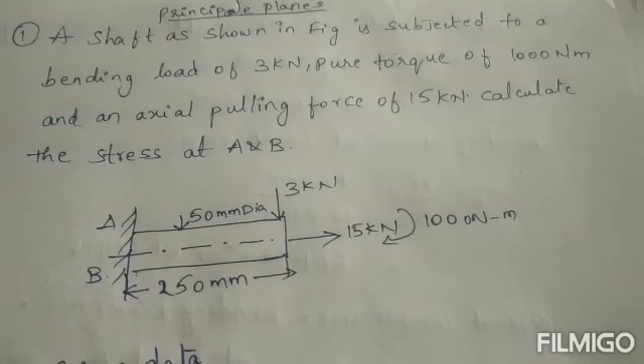స్ట్రెస్. నేను 3 ఫార్ములాస్ చెప్పాను, ఒకసారి ఆ నోట్స్ చూడండి అర్థమవుతుంది. In the last classes also we had discussed one problem on the principal stresses problem, అది మనం లాస్ట్ క్లాస్ ఆల్రెడీ చేసాము. ఒకసారి నోట్స్లో రివైజ్ చేస్తే అర్థమవుతుంది.

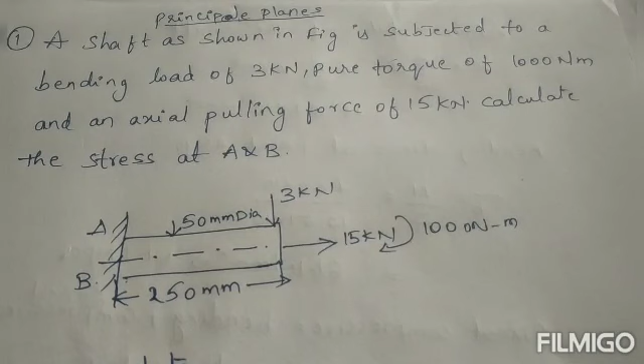నెక్స్ట్ ప్రాబ్లం ఇంకోటి డిస్కస్ చేద్దాము. A shaft as shown in the figure is subjected to a bending load of 3 kN, pure torque of 1000 Nm and an axial pulling force of 15 kN. Calculate the stresses at A and B. పాయింట్ A అండ్ B దగ్గర స్ట్రెస్సెస్ అనేవి కనుక్కోమన్నారు.

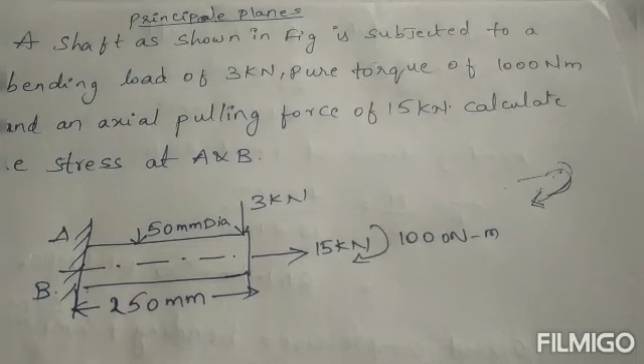క్వశ్చన్లో బెండింగ్ లోడ్ యాక్ట్ అయింది. బెండింగ్ అప్పుడు మెషిన్ మెంబర్ ఒక పాయింట్ నుంచి అనదర్ పాయింట్కి బెండ్ అవుతుంది. బెండ్ చేస్తున్నప్పుడు ఇక్కడ ట్విస్టింగ్ మూమెంట్ అంటే టార్క్ కూడా యాక్ట్ అవుతుంది. అంటే వీ షుడ్ ఫైండ్ అవుట్ బోత్ ద బెండింగ్ అండ్ ఆల్సో ది ట్విస్టింగ్ మూమెంట్ యాక్టింగ్ ఇన్ ది షాఫ్ట్.

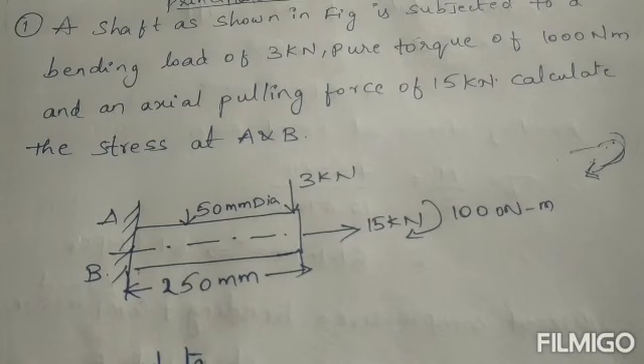In this question they had given pure torque of 1000 Nm and an axial pulling force of 15 kN. Calculate the stresses at points A and B. డయాగ్రామ్ చూస్తే మనకి ఒక మెషిన్ మెంబర్ ఇచ్చారు పాయింట్ A అండ్ B దగ్గర. ఆ మెంబర్లో 2 లోడ్స్ యాక్ట్ అవుతున్నాయి, వన్ ఇస్ 3 kN, అనదర్ వన్ ఇస్ 15 kN. 3 kN కంప్రెసివ్ ఫోర్స్ లో యాడ్ అవుతుంది, అంటే అది డౌన్వర్డ్ పొజిషన్.

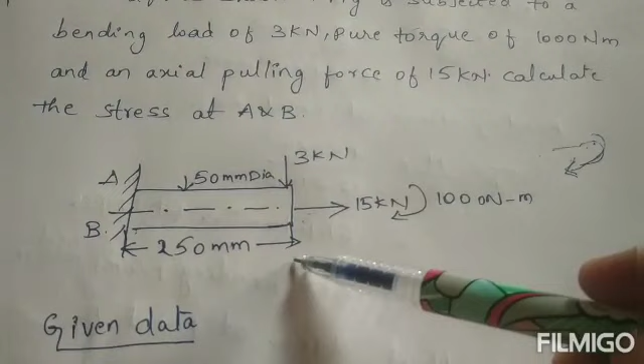15 kN విత్ ద లోడ్ ఈస్ యాక్టింగ్ ఎట్ ది యాక్సిస్, అంటే యాక్సియల్ పుల్లింగ్ ఫోర్స్ అనేది జరుగుతుంది, అంటే టెన్సైల్ లోడ్ యాక్ట్ అవుతుంది. ఇక్కడ టార్క్ ఇచ్చారు 1000 Nm అండ్ ఆల్సో లెంత్ ఆఫ్ ది షాఫ్ట్ ఇచ్చారు. ఇప్పుడు స్ట్రెస్సెస్ అట్ పాయింట్ A అండ్ B దగ్గర ఫైండ్ అవుట్ చేయడం జరుగుతుంది.

గివెన్ డేటా: W 3 kN ఇచ్చారు, కన్వర్ట్ చేస్తే 3 × 10³ అవుతుంది. టార్క్ T ఇచ్చారు 1000 Nm, దాన్ని న్యూటన్ mm లో కన్వర్ట్ చేస్తే 1 × 10⁶ Nmm అవుతుంది. నెక్స్ట్ లోడ్ P = 15 kN ఇచ్చారు, అంటే 15 × 10³ N అవుతుంది. D డయామీటర్ 50 mm, L is equal to 250 mm.

ఫస్ట్ వీ షుడ్ ఫైండ్ అవుట్ ది క్రాస్ సెక్షనల్ ఏరియా ఆఫ్ ది షాఫ్ట్. ఏరియా ఫార్ములా తెలుసు, A is equal to π/4 d². D సబ్స్టిట్యూట్ చేయండి, A వాల్యూ వచ్చేస్తుంది.

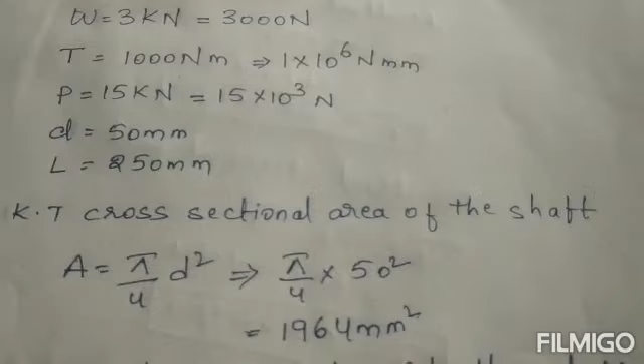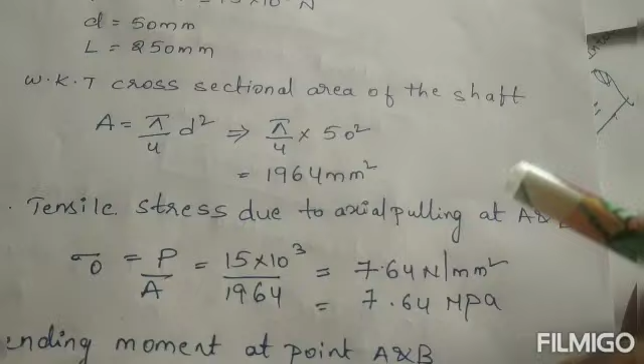నెక్స్ట్ టెన్సైల్ స్ట్రెస్సెస్ డ్యూ టు యాక్సియల్ పుల్లింగ్ ఎట్ A and B: సిగ్మా O is equal to P/A. కంప్రెసివ్ ఫోర్స్ తీసుకుంటున్నప్పుడు రెండు ఫోర్సెస్ యాక్ట్ అవుతాయి, వన్ ఇస్ బెండింగ్ అండ్ ఆల్సో ది డైరెక్ట్ కంప్రెసివ్ ఫోర్స్. సిగ్మా O is equal to P/A, వాల్యూ సబ్స్టిట్యూట్ చేస్తే సిగ్మా O 7.64 MPa వస్తుంది.

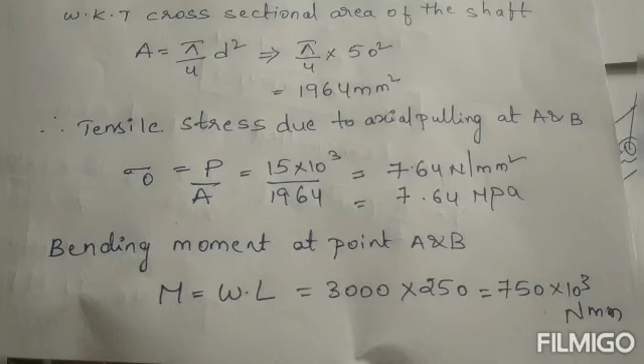యాక్సియల్ పుల్లింగ్ దగ్గర ఫోర్స్ యాక్ట్ అవుతుంది కాబట్టి బెండింగ్ మూమెంట్ అండ్ ట్విస్టింగ్ మూమెంట్ రెండు యాక్ట్ అవుతుంది. ఇప్పుడు బెండింగ్ మూమెంట్ అట్ పాయింట్ A అండ్ B ఫైండ్ అవుట్ చేయడం జరుగుతుంది. M is equal to W into L, దాని యొక్క లోడ్ అండ్ లెంత్ క్యాలిక్యులేట్ చేస్తాము. W అంటే 3000 తీసుకుంటాం, L అంటే 250 క్వశ్చన్లోనే ఇచ్చారు.

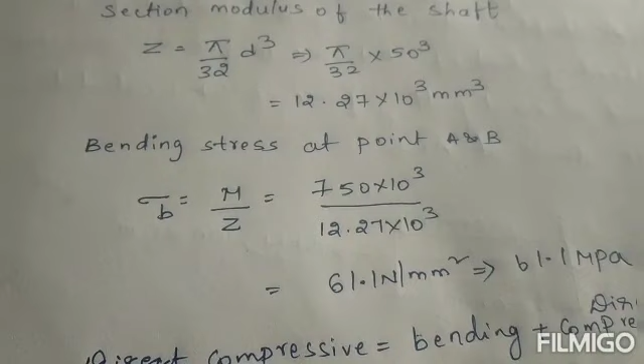నెక్స్ట్ సెక్షన్ మాడ్యులస్ ఆఫ్ ది షాఫ్ట్ తీసుకుంటాం. షాఫ్ట్కి సెక్షన్ మాడ్యులస్ Z తో టర్మ్ చేస్తాం. Z is equal to π/32 × d³ తీసుకుంటాం. సబ్స్టిట్యూట్ చేస్తే 12.27 × 10³ అవుతుంది.

బెండింగ్ స్ట్రెస్సెస్ అట్ పాయింట్ A అండ్ B, అంటే సిగ్మా B. స్ట్రెస్ బెండింగ్ స్ట్రెస్ ఇస్ ఈక్వల్ టు M/Z, బెండింగ్ మూమెంట్ బై సెక్షన్ మాడ్యులస్. సబ్స్టిట్యూట్ చేస్తే వాల్యూ 61.1 MPa వస్తుంది, అంటే N/mm². 1 N/mm² ఇస్ ఈక్వల్ టు 1 MPa, అందుకని మెగాపాస్కల్ కూడా రాసుకోవచ్చు.

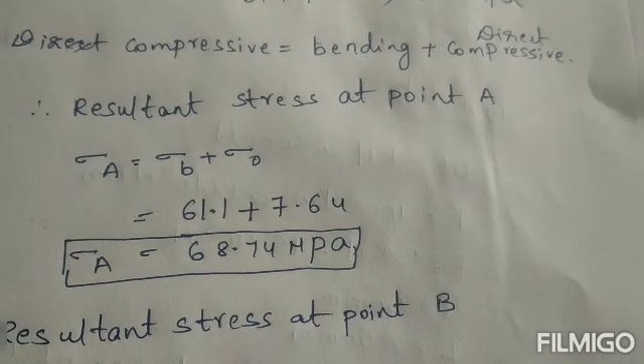ఇందాక చెప్పాను కంప్రెసివ్ స్ట్రెస్ అంటే బెండింగ్ ప్లస్ డైరెక్ట్ కంప్రెసివ్ స్ట్రెస్ తీసుకోవచ్చు. ఇప్పుడు రిజల్టెంట్ స్ట్రెసెస్ అట్ పాయింట్ A తీసుకోవాలి, అంటే సిగ్మా A ఈస్ ఈక్వల్ టు సిగ్మా B ప్లస్ సిగ్మా O గా తీసుకుంటాం. బెండింగ్ స్ట్రెస్ అండ్ ఆల్సో డైరెక్ట్ కంప్రెసివ్ స్ట్రెస్ వాల్యూ సబ్స్టిట్యూట్ చేస్తే సిగ్మా A వస్తుంది. అలాగే రిజల్టెంట్ స్ట్రెసెస్ B అనేది తీసుకుంటాం.

If you see in this paper, the concept of direct and bending stresses which is acting in the equations.

Okay, first I am taking, there are two types of loads: one is axial load and also the eccentric load. Let me take this diagram.

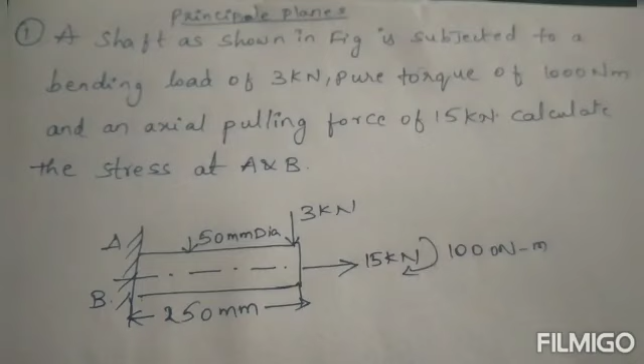In the last class we have discussed about the different types of stresses acting in the machine members, and also the introduction of the design of machine members, and we have discussed the principal stresses and the principal strains acting in the different types of machine members.

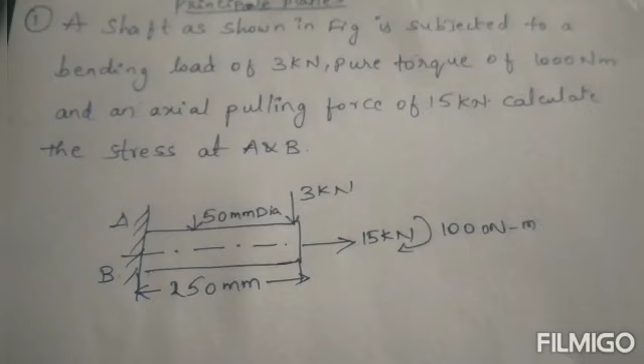In this class we will discuss one of the problems on principal planes. Principal planes is nothing but it is acting both in the principal stresses and also principal planes. Okay, let's see the problem.

First study the problem. A shaft as shown in the figure is subjected to a bending load of 3 kN, pure torque of 1000 Nm, and an axial pulling force of 15 kN. Calculate the stresses at A and B.

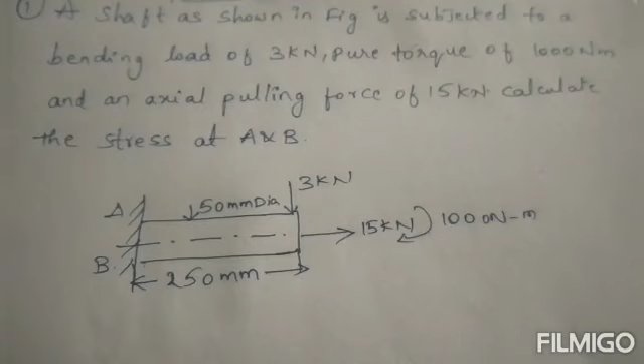What they had given in the problem: they had given the bending load, torque, and axial pulling force. Axial pulling force means, as I have already discussed in the last class, axial is nothing but the load acting at the center of the axis. Axial pulling force of 15 kN.

Calculate the stress at A and B. If you see in this diagram, this is one type of machine member. In this machine member there are two stress points, namely A and B, and also two loads are there acting at A and also the axial pulling force. It is nothing but 3 kilonewton and also 15 kilonewton.

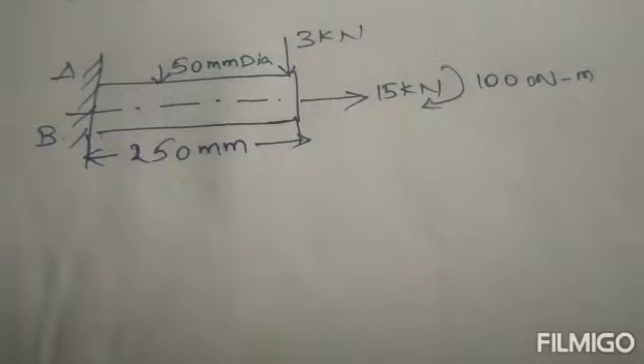The diameter is 50 mm, and the length of the machine member is nothing but 250 mm, and they had given the torque as 1000 Newton meter. Okay, now we will discuss and also do the problem, and we should find out the stresses at A and B.

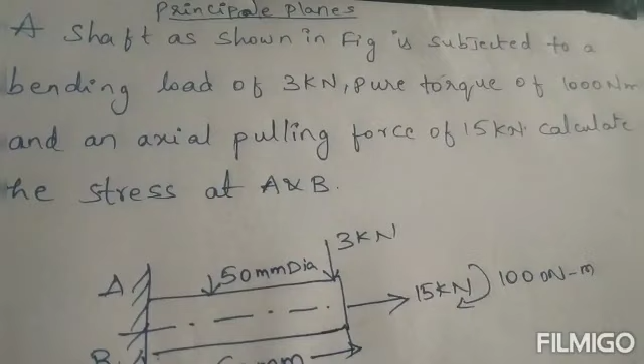First, write out the given data in the problem. What they had given is a shaft as shown in the figure is subjected to a bending load of 3 kN, pure torque of 1000 Newton meter.

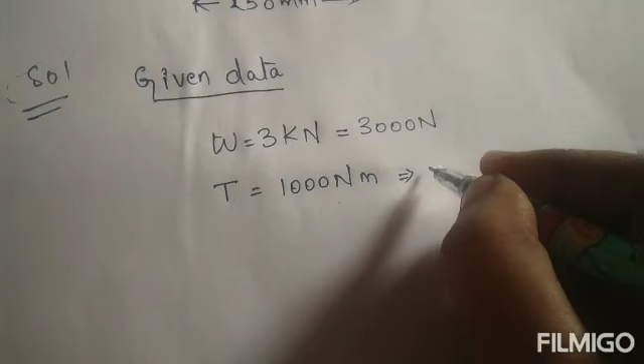Bending load is nothing but we can take it as W or P. How much they had given? They had given 3 kilonewton. 3 kilonewton, if you convert into Newtons, is 3 into 10 cube, which is 3000 Newton. Torque they had given as 1000 Newton meter. If you convert into Newton mm, we can write it as 1 into 10 to the power of 6 Newton mm.

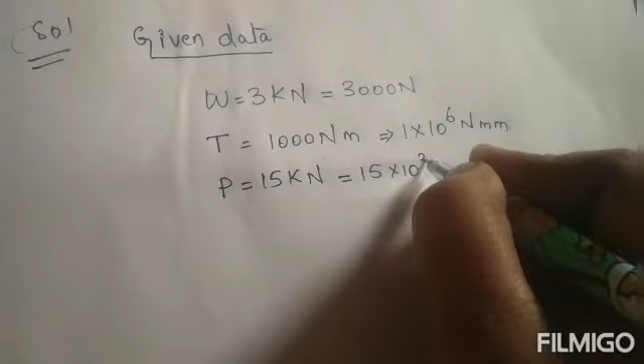Also, axial pulling force of 15 kilonewtons, I am taking it as P, or you can write it as W1 and W2. 15 kilonewtons, convert into Newton, 15 into 10 cube Newton. Diameter D is equal to 50 mm. Length of the shaft is nothing but 250 mm. This is the given data which is given in the problem.

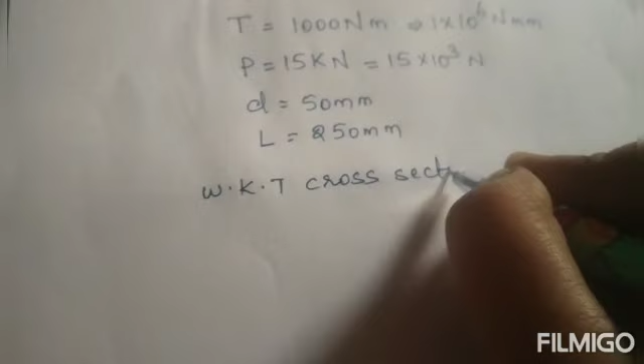Now we should find out the stresses acting at point A and B. First we should find out the cross-sectional area of the shaft. What is the formula of the area? As we know, A is equal to pi by 4 d square. Substitute the d, pi by 4 into 50 square. If you calculate, you will get the answer.

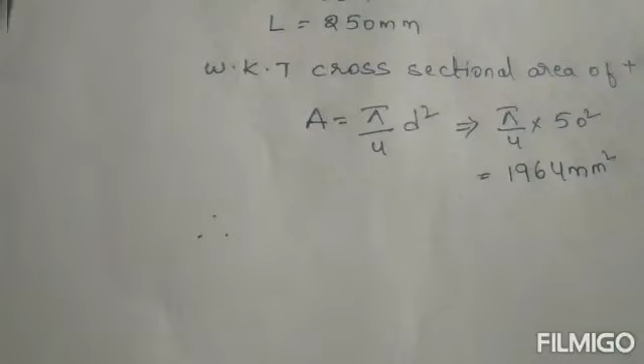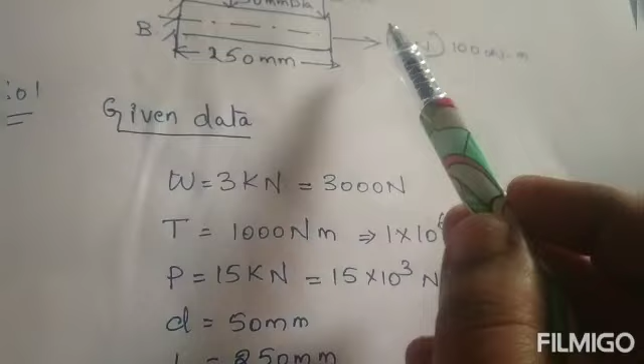1964 mm square. Next, after finding out the cross-sectional area, we should find out the stresses due to axial pulling at points A and B. Tensile stress, we are taking tensile stress. Why? At the middle, due to the axial pulling force, it is acting in the tensile direction, not compressive, it is tensile. That's why we should find out the tensile stress due to axial pulling at points A and B.

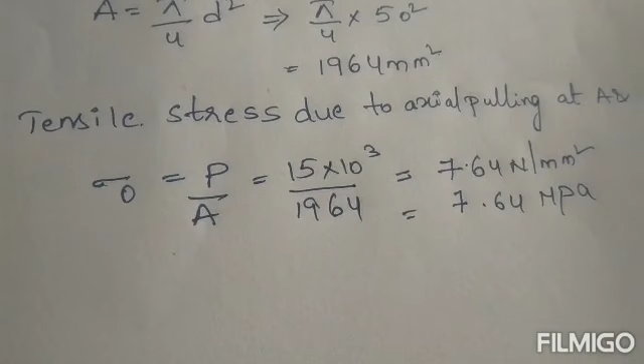Axial pulling force means we will take it as direct axial pulling force. Sigma O is nothing but P by A, stress is equal to load by area. P is nothing but we are taking the tensile force, that's why we will take 15 into 10 cube. By area, we got 1964. If you calculate, you will get the value 7.64 Newton per mm square, which you can write as 7.64 megapascal. This is the value of the tensile stress due to axial pulling at A and B.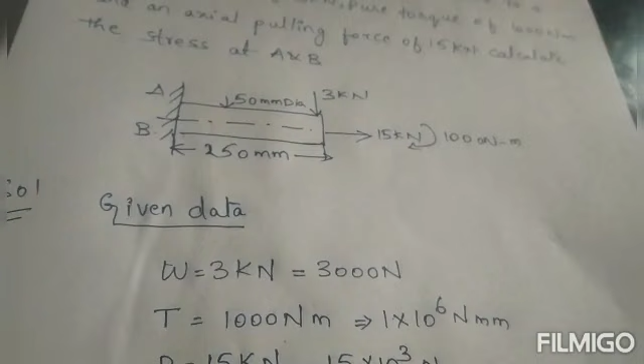Next you should find out the bending moment, section modulus, and the stresses acting at point A. Why are we taking the bending moment? When we twist the machine members, there will be total bending moment acting. That's why we are taking the bending moment at point A and B. How will we take the bending moment? As you know, M is equal to

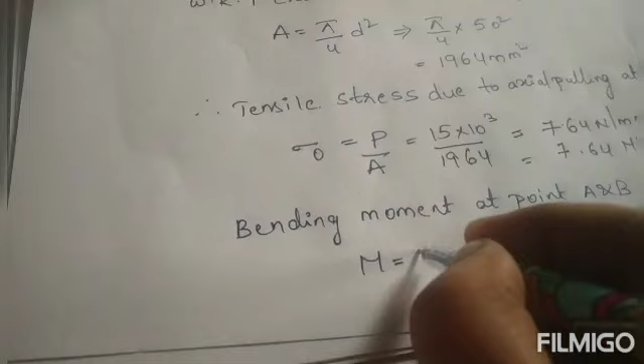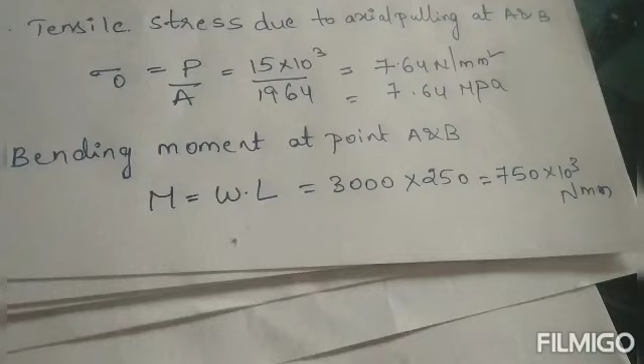W into L, weight into length of the shaft. W is equal to 3000, into length which is 250. We can take it as 750 into 10 cube Newton mm. This is the equation for the bending moment acting at point A and B.

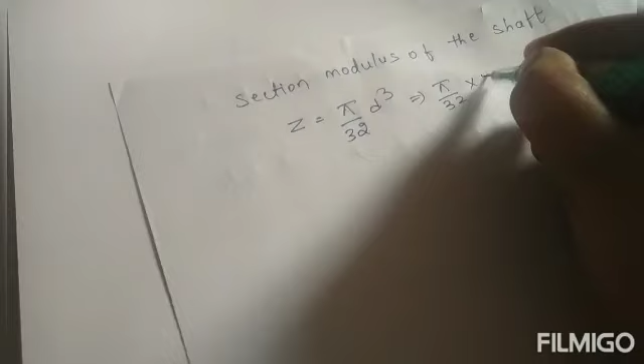Next we should find out the section modulus of the shaft. Section modulus of the shaft, we will take it as Z. Z is equal to pi by 32 d cube. Substitute the values, pi by 32 into 50 cube, you will get 12.27 into 10 cube mm cube. This is the value taken as section modulus of the shaft.

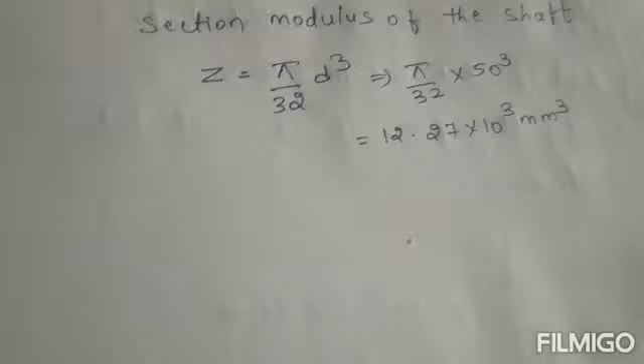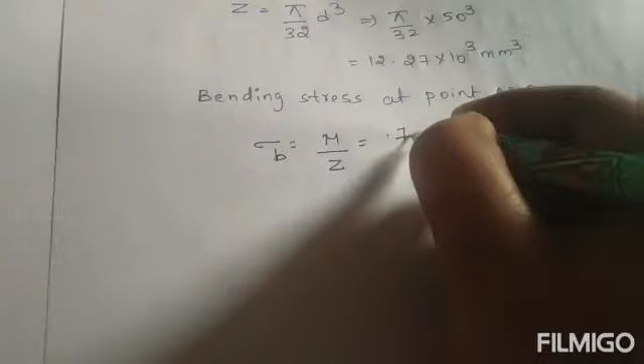We found the bending moment and section modulus. Now you should find out the bending stresses at point A and B. Bending stress sigma B is equal to M by Z. M value is 750 into 10 cube, by Z value which is 12.27 into 10 cube. This is the value of sigma B, which is nothing but M by Z.

750 into 10 cube by 12.27 into 10 cube. If you calculate the value, you will get 61.1 Newton per mm square, which is nothing but 61.1 megapascal. 1 Newton per mm square is equal to 1 megapascal.

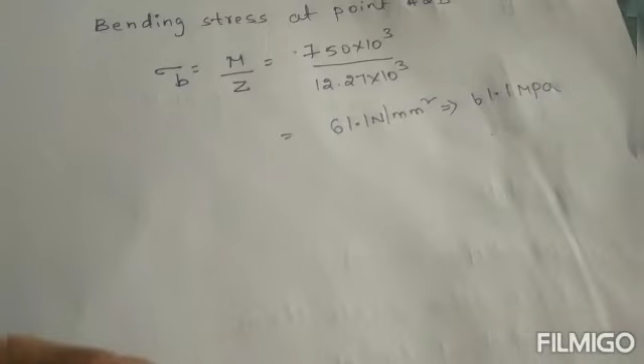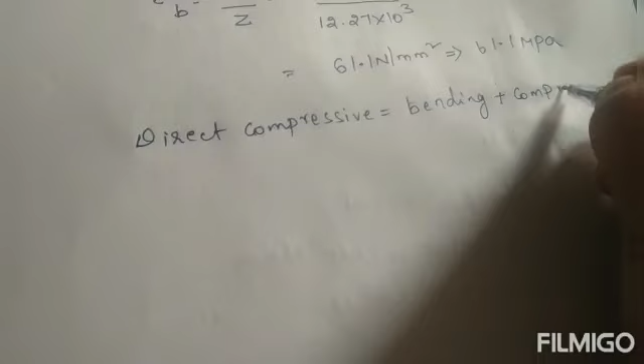Okay, we find out the bending stresses acting at point A and B. Next we should find out the compressive stress. As told in the last class, direct compressive stress means we are compressing the material. That's why the direct compressive stress formula is nothing but bending and also the direct compressive force, which we will take as the resultant stresses.

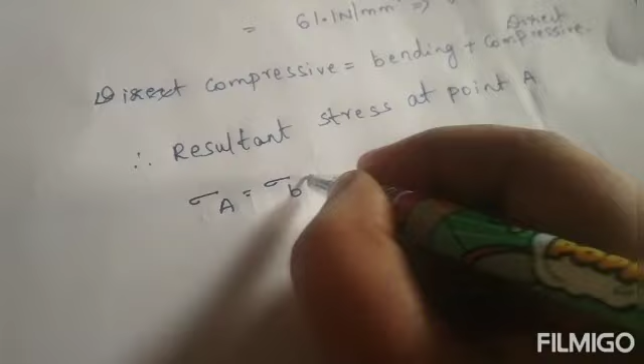Stresses at point A: Sigma A is equal to, as we solved in the previous problem, Sigma A is equal to Sigma B plus Sigma O, where Sigma B is nothing but bending stress and Sigma O is nothing but direct compressive stress.

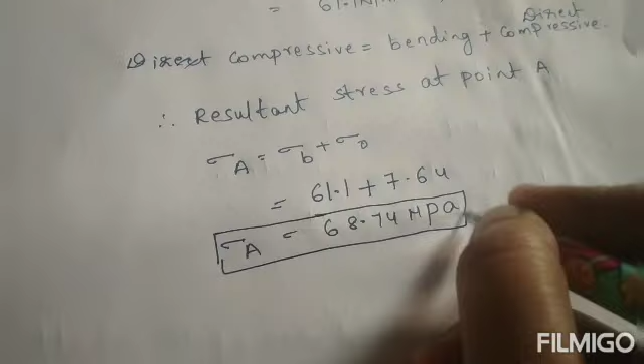Sigma A equals 61.1 plus 7.64. If you calculate the value, you will get 68.74 megapascal. This is the stress acting at point A. Like that, you should find out the resultant stress at point B.

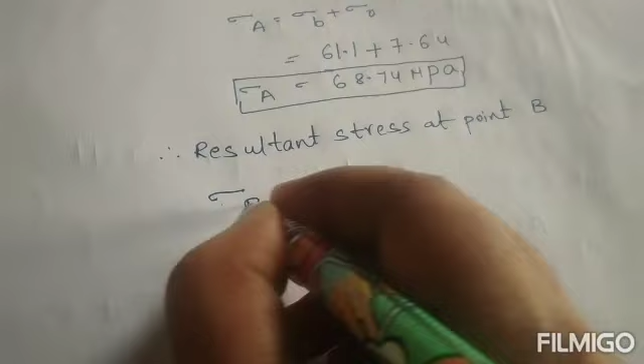Sigma B is equal to, you will get the negative direction, that's why Sigma B minus Sigma O: 61.1 minus 7.64. You will get the stress at point B as 53.46 megapascal.

Okay, this is the value which up to now we find out, the bending stresses and also the compressive stresses at point A and B.

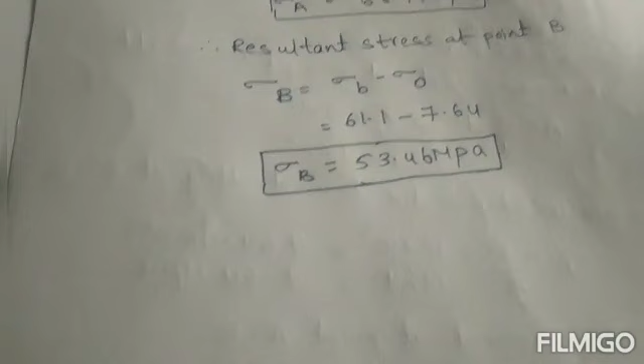Now we should find out the torque. Torque is nothing but, as we know, the torque transmitted. Write that torque transmitted completely fair in the notes also, torque transmitted at point A and B. As you know the torque equation, T is equal to pi by 16 tau d cube.

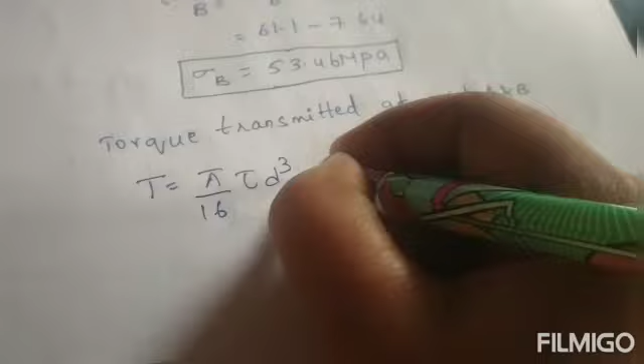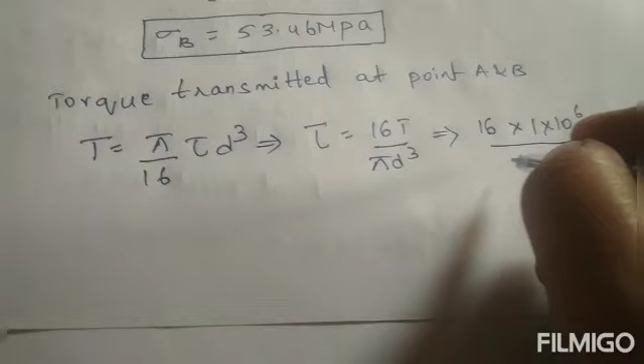Taking the torsion equation, you will get 16T by pi d cube. Substitute the values: 16 into torque, given as 1 into 10 to the power of 6, by pi d cube, where d is 50 cube. If you calculate all these values, you will get 40.74 Newton per mm square.

You can take it as 40.74 megapascal. This is the value of the torque transmitted at point A and B. Next, we should find out the stresses acting at point A and B. As discussed in the last class, we found maximum and minimum stresses acting at point A and B using the equations of the torque.

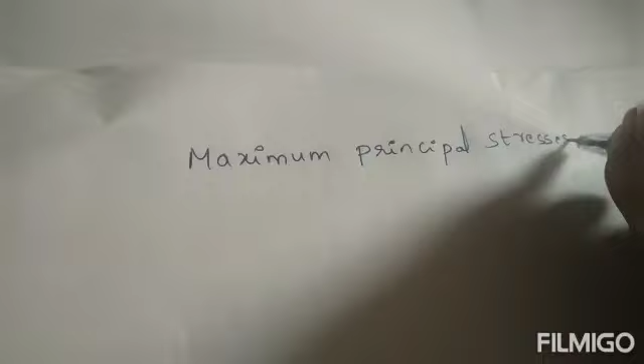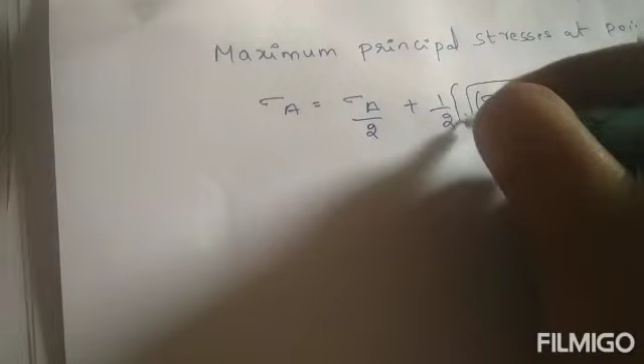I am taking as maximum principal stresses at point A. As you know, Sigma A is equal to Sigma A by 2 plus 1 by 2 square root of Sigma A whole square plus 4 tau square. This is the formula for maximum principal stress.

Okay, this is the formula for maximum principal stress. The actual formula is Sigma A plus Sigma B by 2 plus 1 by 2 square root of Sigma A plus Sigma B whole square plus 4 tau square. But here Sigma B will be 0 at this point of the stresses, because it is acting as biaxial stress, so Sigma B will be 0.

Now substitute the values. What is the value of Sigma A? 68.74 by 2 plus 1 by 2 square root of 68.74 whole square plus 4 into 40.74 whole square. If you calculate, you will get 34.37 plus 53.3, so Sigma A is 87.67 megapascal.

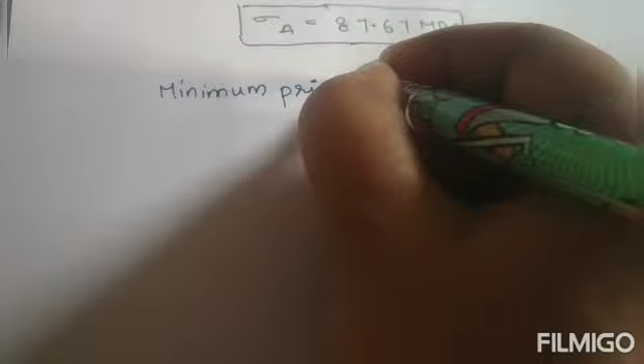Okay, this is the equation which we are using for the maximum principal stress. Now the minimum principal stress. What is the formula for minimum principal stress? Same formula, but you will keep it as minus. Minimum principal stress at point A: Sigma A is equal to Sigma A by 2 minus 1 by 2 square root of Sigma A whole square plus 4 tau square.

Okay, substitute the equation: 68.74 by 2 minus 1 by 2 square root of 68.74 whole square plus 4 tau, where tau means 40.74 whole square.

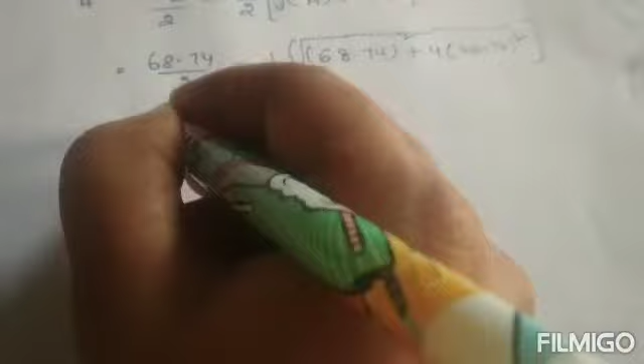Okay, this is the value. Maximum principal stress means you will keep it as positive, minimum stress means you will take it as negative. If you calculate the equation, you will get 18.93 megapascal minus, meaning tensile stress acting. If you take it as compressive, it's 18.93 megapascal for compressive stress. So you find out the maximum principal stress and also minimum principal stress.

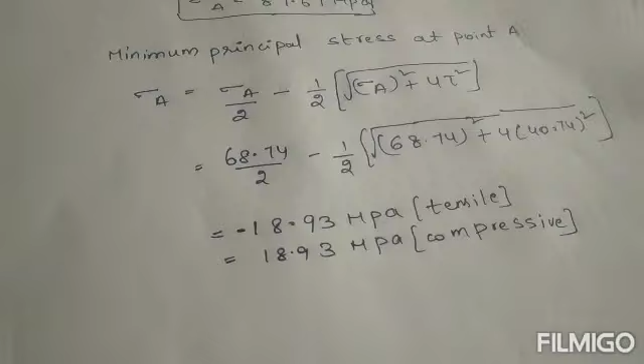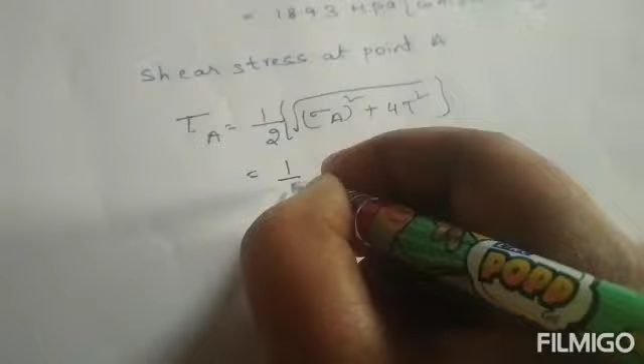Next we should find out the shear stress at point A. All these formulas we have discussed in the principal stresses and principal planes chapter. Once you revise those formulas you will get it easily. The formula is half into sigma A whole square plus 4 tau square. Substitute the values: sigma A means 68.74 whole square plus 4 into 40.74 whole square. If you calculate, you will get 53.3 megapascal. This is the shear stress acting at point A.

Same procedure you can use to do stresses at point B. Stresses at point B means you can calculate both maximum principal stress at point B and minimum stress at point B. This is the stresses at point A. Next we will calculate the stresses at point B also. Maximum...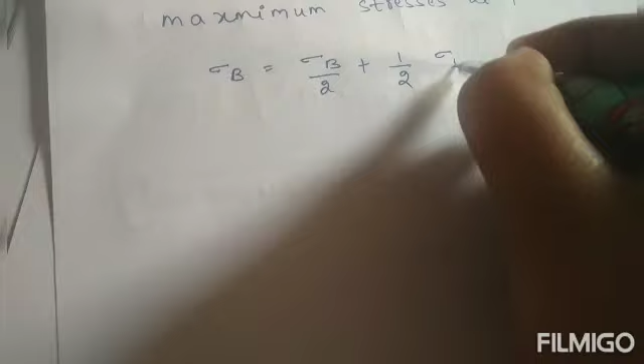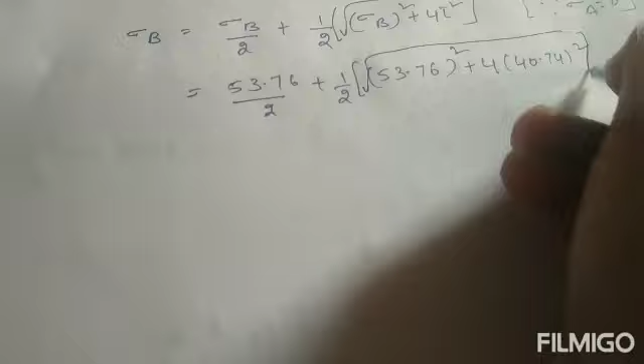Stresses at point B use the same formula, just write sigma B instead of sigma A. Sigma B is equal to sigma B by 2 plus 1 by 2 square root of sigma B whole square plus 4 tau square, where here sigma A is equal to 0. Sigma B is nothing but 53.76 by 2 plus 1 by 2 square root of 53.76 whole square plus 4 into tau, which is 40.74 whole square. Substitute all the values, and if you calculate, you will get 75.46 megapascal. That is sigma B.

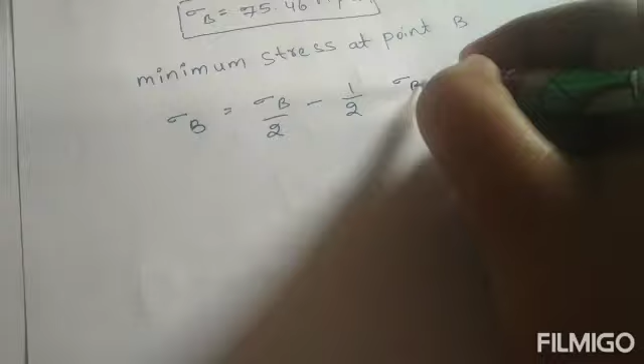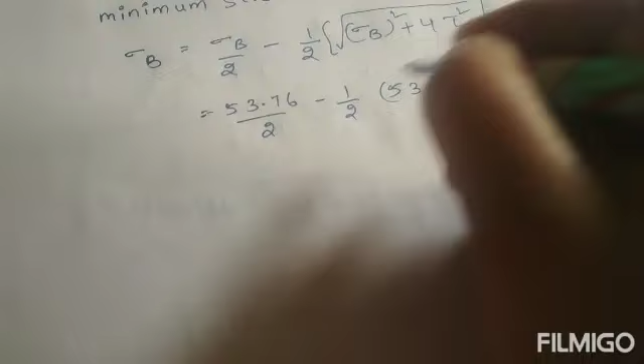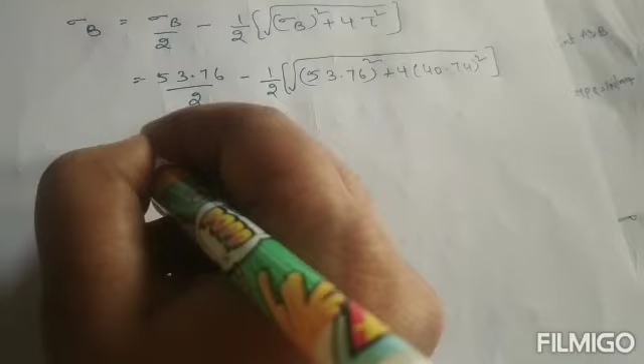Okay, like that you should calculate minimum stresses at point B. Sigma B is equal to sigma B by 2 minus 1 by 2 square root of sigma B whole square plus 4 tau square. Sigma B is nothing but 53.76 by 2 minus 1 by 2 square root of 53.76 whole square plus 4 into 40.74 whole square. In the first one we took sigma B by 2 plus 1 by 2, and in the minimum stress we take sigma B by 2 minus 1 by 2. If you calculate, you will get the value as 22 megapascal. This is the minimum stress at B.

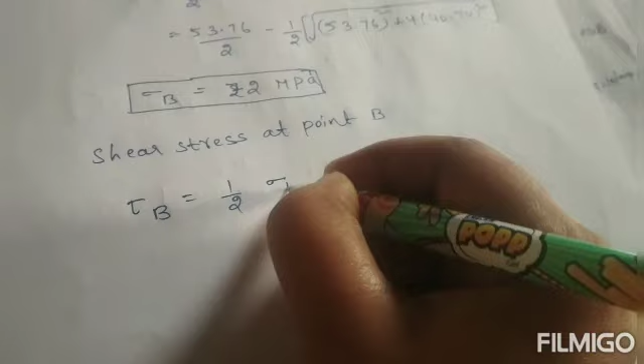Next we should find out the shear stress at point B. Shear stress at point B means tau B is equal to half into square root of sigma B whole square plus 4 tau square. Substitute those values: 1 by 2 into 53.46 whole square plus 4 into 40.74 whole square. You will get 48.73 megapascal. This is the shear stress value at point A and B.

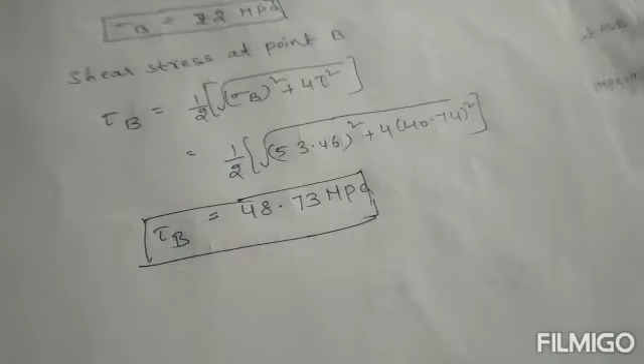Have you understood the problem? Once we will revise the problem. In this problem, in the last classes we had discussed about principal stresses and principal strain. First, what is meant by principal stress? Principal stress is nothing but the load which is acting at the biaxial set of stresses, it is called principal stress. Like that only, the load which is acting in the biaxial strain is called principal strain.

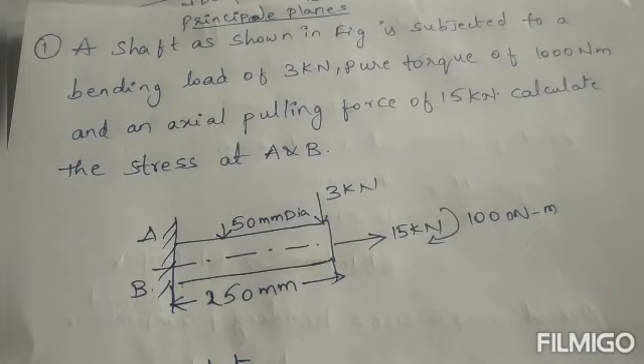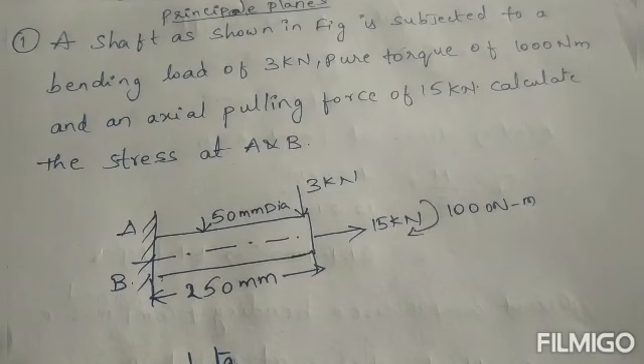Like that only we discussed about the maximum principal stress and minimum principal stress formulas. What are the maximum and minimum principal stress formulas? In the previous classes also we discussed this. The formula is sigma A by 2 plus 1 by 2 square root of sigma A whole square plus 4 tau square. That is the formula for minimum principal stress, maximum principal stress, and shear stress theory. I told the 3 formulas of maximum principal stress, minimum...